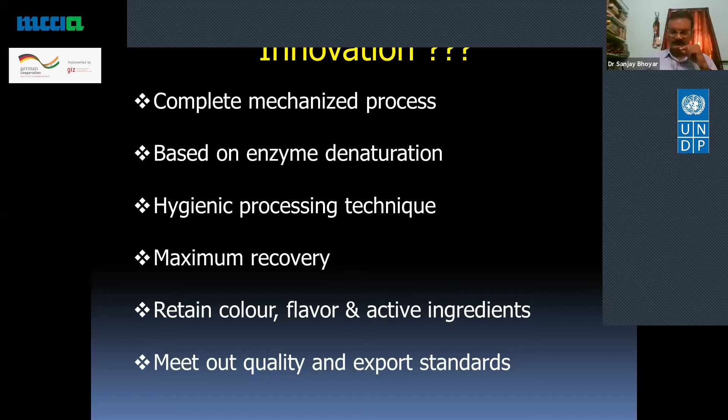And the last important point is that with existing traditional technologies, there is some deterioration of the product, and it may not reach export standards. So here we have taken care that under the mechanized process, we reach the export standard so that our concentrates made with this technology can be exported to European countries, the European Union. Presently, we are mostly exporting turmeric powder or onion powder to the Gulf countries. So we have to explore the market.

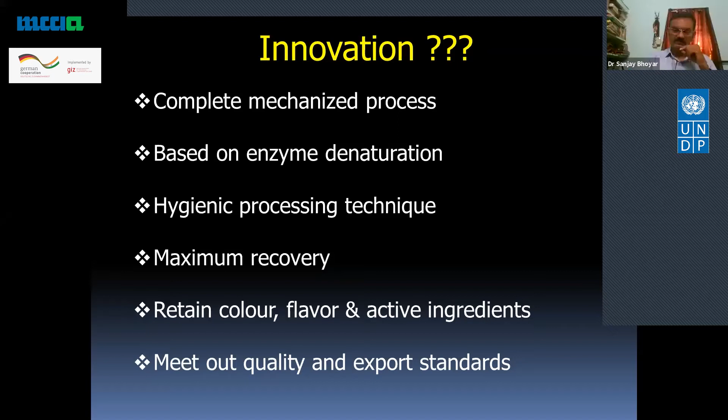I think we already discussed that these are perishable commodities. Technology is needed for increasing shelf life and off-season availability.

Dr. Bhoyar, if you switch off your video, maybe you will get a better bandwidth. Is it okay? Yeah, now you talk. Yeah, slightly better. This might be due to connection.

So off-season availability, then these are particularly spices containing alkaloids, which have medicinal value, so processing is needed. Then value addition; mostly what we need now is rural entrepreneurship, where these products should be processed in that particular area of production, so that the farmer may get higher prices for the material.

As I told you, there are active ingredients which have commercial value. Turmeric has curcumin, the yellow color of turmeric powder is because of this. Ginger has gingerol, which has medicinal value. Onion and garlic have allicin, which is an organosulfur compound. These are the compounds or alkaloids present in turmeric, ginger, onion and garlic which have market value, and we can process this material for extraction of curcumin, gingerol, and allicin for medicinal use.

The technology we are talking about is for processing farm-fresh turmeric rhizome. This is an innovative technology because we are bypassing the step of cooking the turmeric rhizome.

Second, we have new dryers for this pre-processed turmeric, and we are not doing any polishing of the material. With this technology we will get directly either dry concentrate powder, or we will get flakes, which are dried flakes or dried pieces.

With this same technology, if we establish this processing plant, it will be operated for 3 to 4 months. So what do we do for the rest of the year? We have re-researched this technology and obtained very encouraging results.

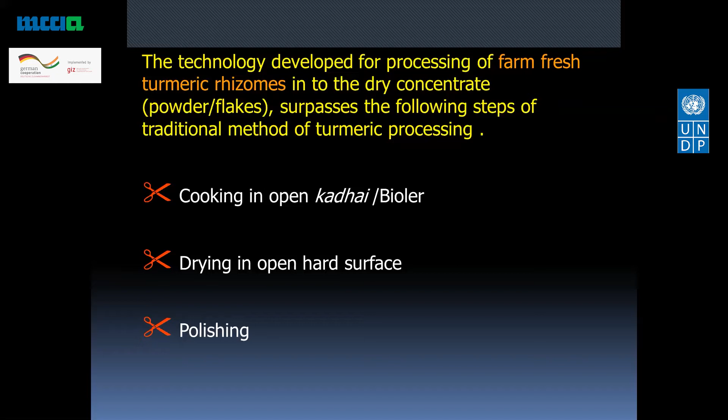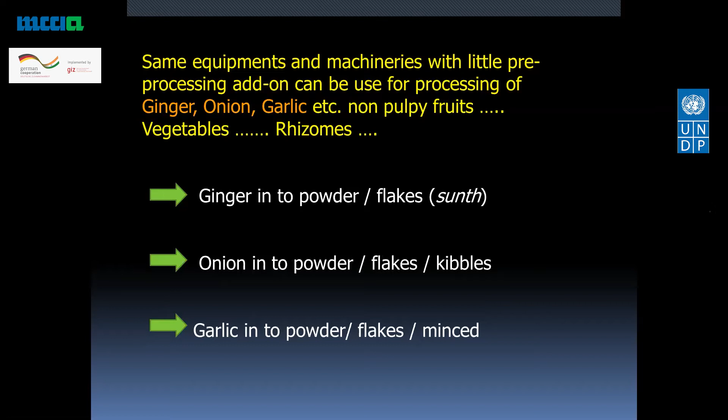Using the same equipment and machinery, with the addition of some add-on pre-processing equipment, we can process ginger or other non-pulpy fruits, vegetables, using this technology. From ginger we can process ginger powder or flakes, which we call sunth. From onion we get flakes, kibbles, and onion powder, and from garlic we get powder, flakes and minced. So we can run this plant throughout the year using multiple inputs, and get quality powder or quality products from this.

Flowchart: first is fresh turmeric, garlic, ginger, or onion. The next step is pre-processing, which consists of washing in case of turmeric and ginger, and peeling in case of garlic. There is no need of peeling in case of onion. Then, the second step, we slice, cut or dice the material.

In case of turmeric and ginger, we slice the material to increase the surface area, so that there is better enzyme denaturation treatment, and the increased surface area speeds up the drying of the treated material. For onion and garlic, we do dicing or cutting into pieces, so that the surface area can be improved.

The gist of this technology is enzyme denaturation. We do this so that further degradation or activities that happen during drying are arrested, and we get the product as such, having natural color, flavor, aroma, and the other alkaloids present in that particular material.

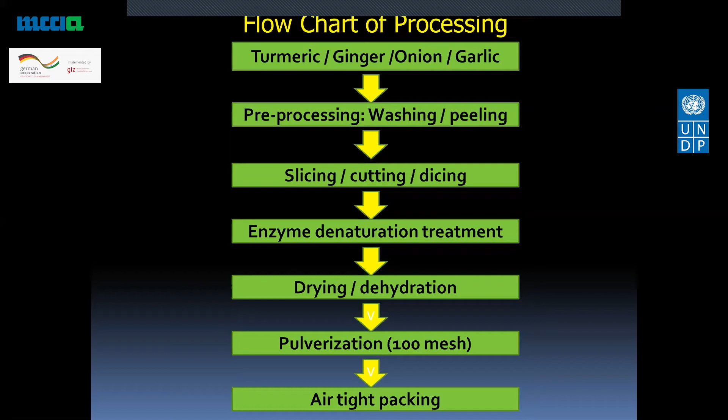The last step is drying or dehydration. Here we use a mechanical dryer. We can't allow the material to dry in open air, because even with an increase in temperature to 50-55 degrees, there is still moisture retention of about 10%. For any perishable material, if you want to increase its shelf life, we have to dry it down to 5 to 6%. At that level, there is no infection by microbes, quality is improved, and shelf life is also improved. This is only possible with the use of mechanical dryers.

After drying, the last process is pulverization. For powder use, we have to pulverize this material, and airtight packing is needed, so that it does not reabsorb moisture and there is no deterioration.

Considering the type of equipment, we can complete a batch of drying within 4 to 6 hours. Drying of onion will need a little less time compared to garlic, ginger, and turmeric, as this also depends on the moisture content of the particular material.

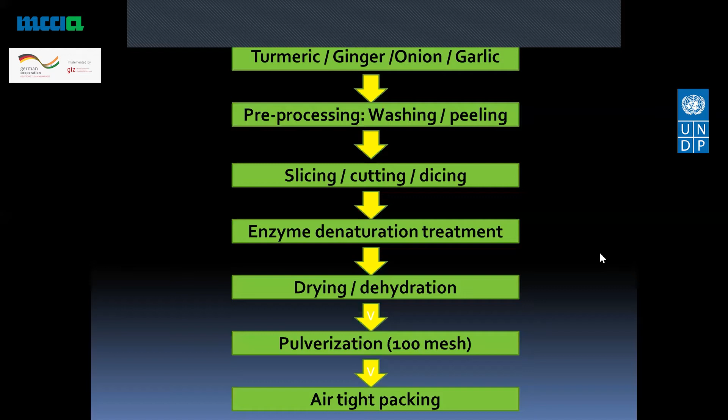So the project which we have been discussing here is a 2.5 ton, 25 quintal batch type farm fresh material project, and by using two different types of processes, we can process 5 ton or 10 ton per day. That I will tell you.

We'll see in picture the recovery of the product, depending upon the moisture content in the particular rhizomes. From turmeric we get 22% recovery of the powder, not talking about the dried part, the finished and final product of the turmeric. From ginger, we'll get about 20%. And garlic, we get 30% recovery of powder or dry material. So this is the scenario of the 2.5 ton plant capacity.

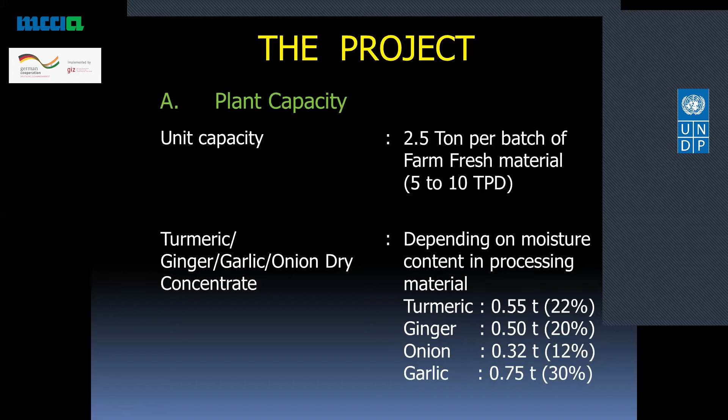All the equipment which we are using has a drying efficiency of 95%, and a grinding efficiency of 99%. This plant needs a continuous, uninterrupted supply of electric power, connected to the grid only in this case. Otherwise, it will go for the drying or for the pulverization of the dried rhizome. Minimum requirement of electricity power is 415 V, but here the entire plant runs on a connected load of 25 HP.

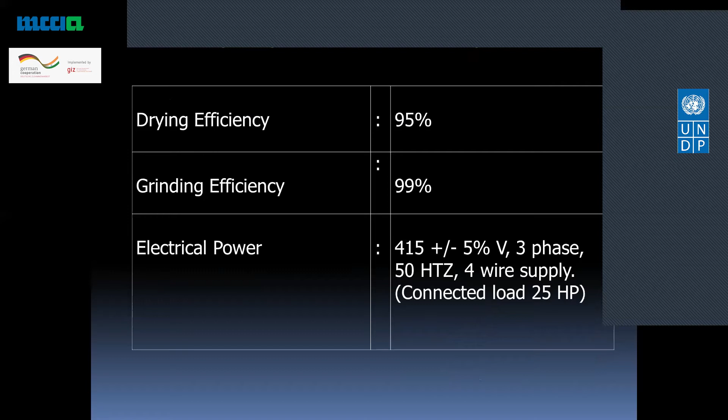If we go section wise, what will be the configuration of the processing plant? The first section is raw material receiving, storage and handling, which includes lifting facility, conveying facility, and suitable storage. Then the second section is cleaning and washing.

Here we will clean the material. There is adhesion of soil as well as hairs on the turmeric and ginger, and for onion and garlic, we need to peel it.

Then the cutting and slicing section. This is the third section where we need to cut the rhizomes or bulb into suitable sizes for processing. If we are processing for making powder, we cut the rhizomes of turmeric and ginger into slices. If you want particularly turmeric for extraction by solvent extraction method, then we need to go for dicing, the dices of 1 to 1.5 centimeter. So accordingly we can select the process of primary processing.

Then the enzyme denaturation, where by avoiding open boiling, cooking, and all these things, we have denatured the material using a special type of reactor vessel, around the volume of 3000 liters. That I will show you in the picture.

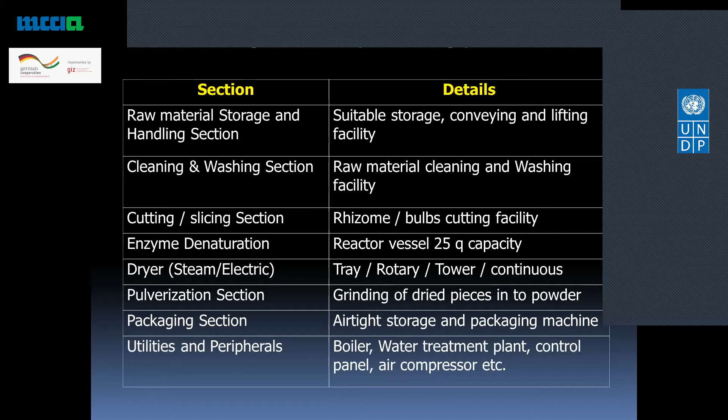Then the last section is utilities and peripheries. If you use the boiler, we have a boiler, water treatment plant, control panel, air compressor for cooling, etc. All these are the utilities and peripheries required for the processing.

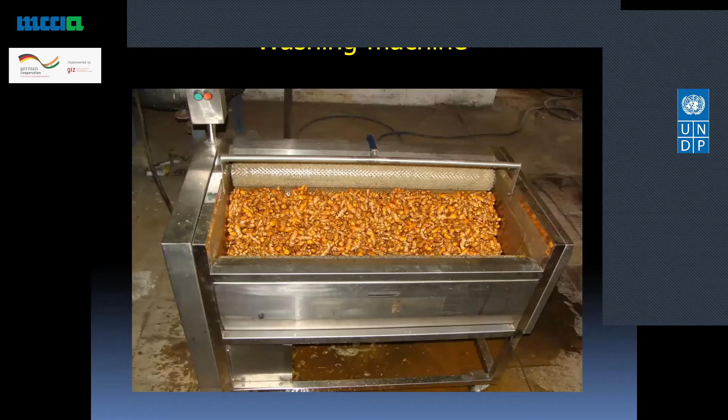So when material reaches the processing plant, we have to go for washing. Here I am showing the picture of the 7-roller washer type, which can be used for washing turmeric and ginger only. There is no need for onion and garlic.

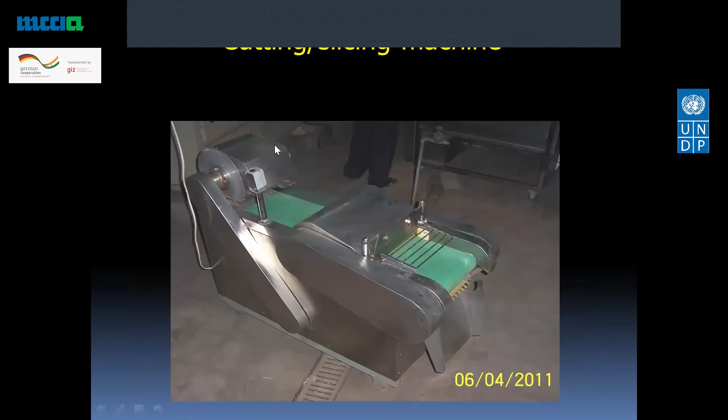This is the cutting and dicing machine, a specially designed machine. If you want to go for slices, you have to put the material here. You will get slices just like potato chips, elongated slices from turmeric and ginger.

And if you want to dice, we put the material here, and this plate cuts it into 1 to 1.5 centimeter dices, which we can use for processing. However, in case of onion, we have to slice it vertically, so a different type of add-on slicer equipment is needed, and garlic can also be diced using this.

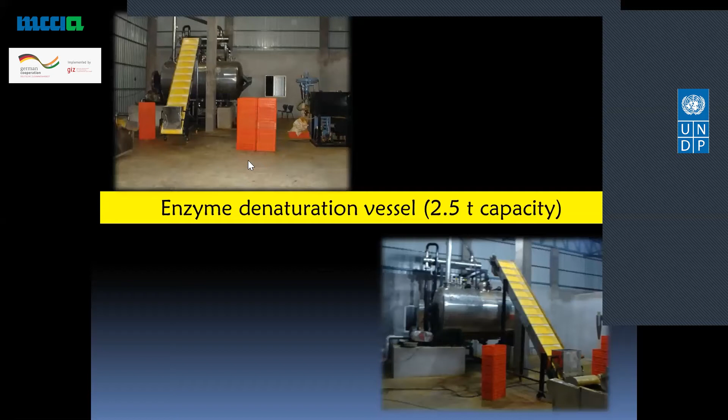This is the plant. Here you can see the first plant we have established at Salgare district, Sangli. The plant has a capacity of 2.5 tons because the dryer used is a cabinet type walk-in dryer, tray dryer.

Two dryers have been placed, each dryer being used. So after putting the first batch in drying, we can use the second for reprocessing. By the time it is dried, again we will get the first one out. Plant.

The second project, a 2 ton per day project, S 4 Foods Industry at Bilda District of Aurangabad. This was the process plant, the material. What you're seeing here is selling the window outside the plant.

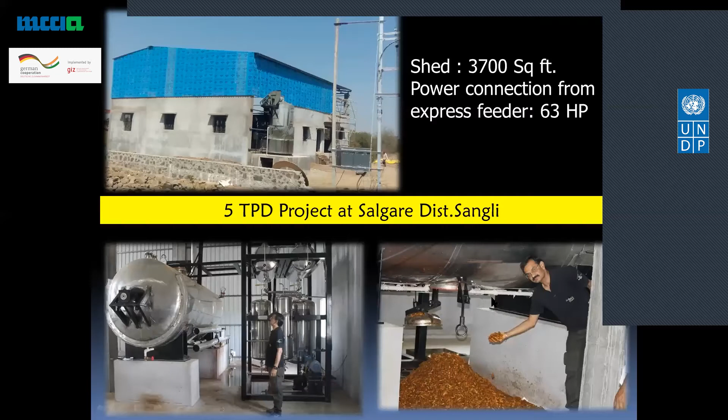The interesting thing is this: this entrepreneur also started this. He also developed the brand Shivneri, and we are selling his material under that name, under that brand Shivneri, by using this and also supplying the material.

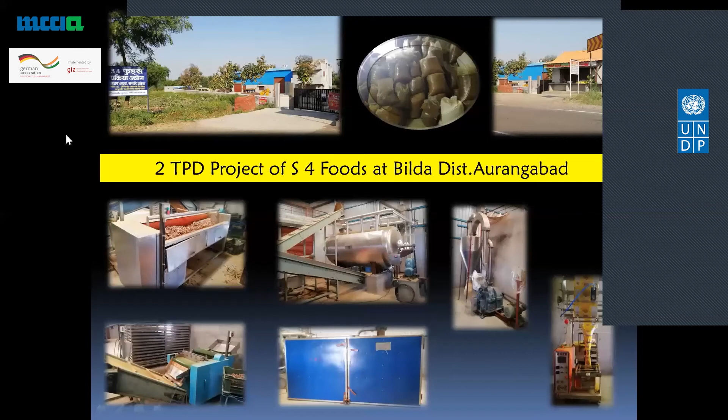So here the important thing is the cost of production of turmeric and ginger, considering the moisture content. We need 5 kg of ginger or turmeric to get 1 kg of powder. So the cost of 5 kg turmeric at the harvesting stage will be around 10 to 15 rupees per kg.

Here we put the figure as 10 rupees. Ginger is 20 to 100 rupees per kg; here we'll put the figure as 20 rupees, the lowest price available to the farmer at harvesting time. So by this, we need an input of 50 rupees for turmeric and 100 rupees for raw ginger.

For cleaning 1 kg, with the assumption of 5 kg required for cleaning and cutting, then denaturation and drying at 5 rupees per kg of powder. Then grinding of the powder at 2 rupees per kg, manpower requirement cost considered at 2 rupees, and other overhead at 1 rupee. So we can value-add the raw material into 85 rupees.

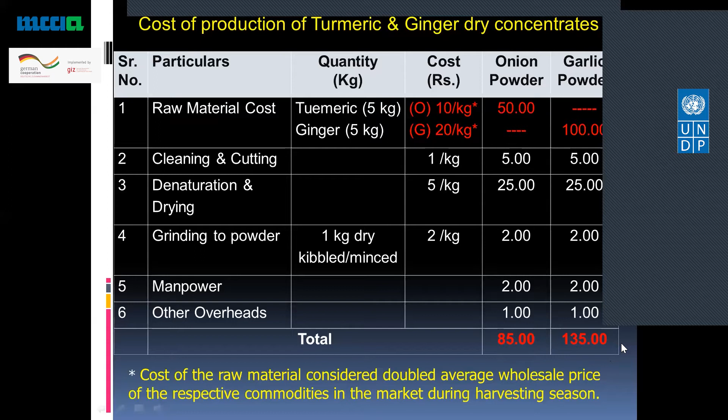So this is the picture. All the cost has been considered on the basis of the market wholesale rate. So these are the products we get from processing using this technology.

So this is the project cost we need for the establishment of this project, 5 ton or 10 ton per day. Here we have not included the cost of land and electric feeder. Civil structure: we need around 3,000 square feet, which will cost around 30 lakhs. We have only these figures of the equipment and machinery. Cleaning and washing machine 5 lakh, cutting and blanching machine 10 lakh, enzyme denaturing reactor will cost around 20 lakhs.

There are 2 types of dryer. Flexibility is here. If you go for the cabinet dryer, the cost is around 30 lakhs. And the continuous conveyor belt dryer, if you use it in your plant, the cost will be around 80 lakhs. So this is the choice of the entrepreneur whether he wants to go for the 5 ton plant or 10 ton plant. Here we have to do only modification. The rest of the equipment and machinery are the same.

Grinding and pulverizing machines 6 to 10 lakhs based on the capacity of the plant. Conveyor and elevator 5 to 20 lakhs, whether we go for semi-automation or complete automation. Then if you go for the boiler or electric supply, 15 lakh will be the cost of the boiler. Cooling tower 2 lakh, compressor and other peripherals 3.50 lakh.

So if you go for the 5 ton plant with a walk-in cabinet dryer, the cost of the machinery and equipment will be around 1 crore 26 lakh. And if you go for the 10 ton capacity plant with automation, the cost will be around 1.78 to 1.80 crore, 1 crore 80 lakhs.